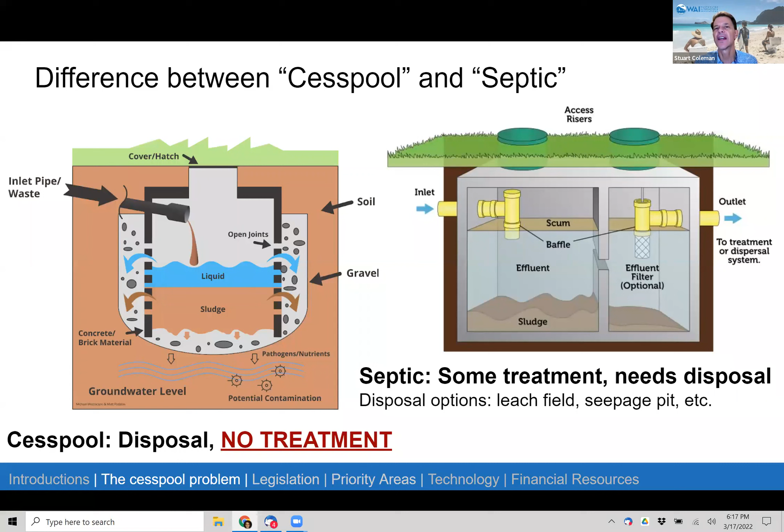A septic tank, on the other hand, is an enclosed tank. All the wastewater comes into the tank, and the solids settle to the bottom. Then the liquids are filtered out and go into a drain field or leach field. Believe it or not, that's where most of the treatment happens—the microbes in the soil, if it's designed correctly, eat up all the waste and take care of a lot of the pathogens. Unfortunately, what it doesn't do is take care of the nutrients. So that's a distinguishing factor between those two.

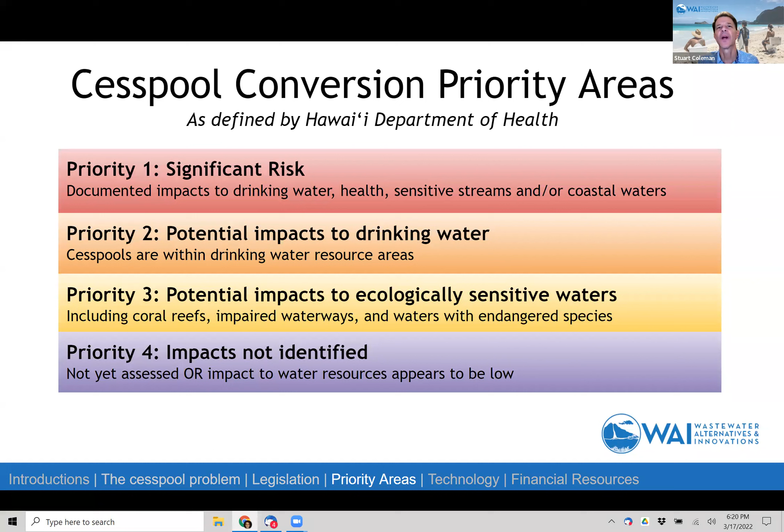Priority two is potential impacts to drinking water in certain areas, such as wells, and we'll share a disturbing statistic from the Big Island about that. Priority three is potential impacts to ecologically sensitive waters and coastal areas, including coral reefs and areas with endangered species and reduced fish populations.

In total, we have 88,000 cesspools across the state, and 49,000 of them are on the Big Island. This is why we're glad you joined us tonight, because it's a serious issue. The Big Island has by far the most, discharging 27 million gallons per day of untreated wastewater. On the Big Island, there are four priority areas. Kea'au has potential impacts to drinking water, which is really serious and what we want to talk about. The other areas have potential impacts that could be upgraded to priority one or two when we finish this reporting.

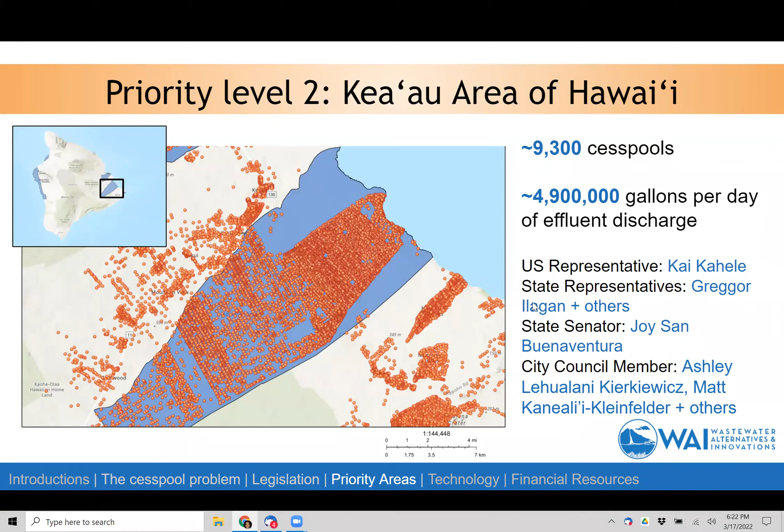Next, I'm going to talk a little about the health and environmental risks of cesspools. There are different types of environmental and health risks. Cesspools can affect drinking water and coastal waters. On the public health side, drinking water pollution can come in the form of different pollutants and pathogens that get into drinking water sources, like your wells. Nitrate is a pollutant from wastewater that can get into drinking water, and nitrate can be connected to increased cancer risk.

You can also encounter pathogens in the environment, such as in the coastal ocean where you go swimming. If you swim in polluted water, you can get sick to your stomach, or get infections on your skin, ear, or eyes, from encountering wastewater-polluted water.

On the environmental side, nutrients that get into our reef environment can lead to invasive algae overgrowth, meaning invasive algae overtakes native limu and corals, degrading the Hawaii coral reef ecosystem. There's also evidence that sewage pollution can lead to increased rates of coral disease and reduced coral cover overall, as well as changes in fish behavior and other harmful effects on the ecosystem.

Finally, there are contaminants of emerging concern. These are chemicals found in plastics and in pharmaceutical products that are getting into the environment and can affect both humans and the ecosystem in ways we're still learning about.

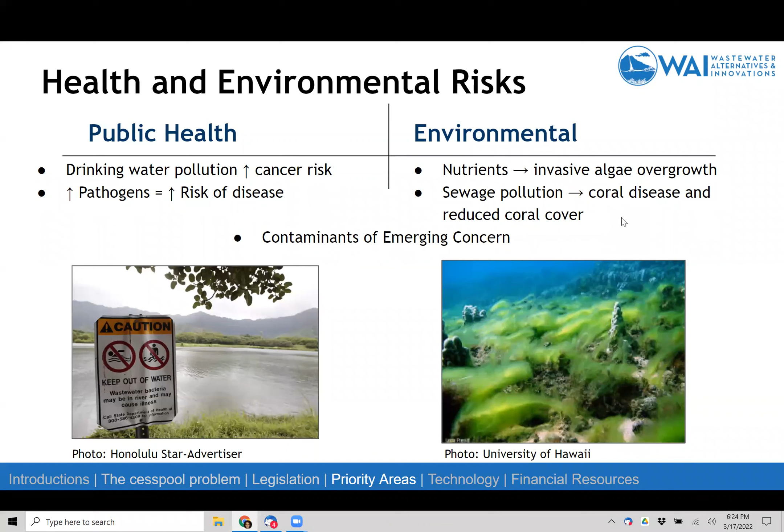So I will talk a little bit now more specifically about water quality in the Kea'au region. As I mentioned before, this region has a risk for drinking water, especially for folks that are on private wells. The way we can track whether there's contamination in your water source is using fecal indicator bacteria, or that's one of the ways. There are several, but this is the way that has been used in this region.

Fecal indicator bacteria aren't typically the bacteria responsible for diseases, but they are found in sewage and they're easy to detect. They're what the US EPA uses. It basically tells you that if there's fecal indicator bacteria in the water, other pathogens are likely present and it's possible you could get sick.

So the bacteria that we use is called Enterococcus, and this is something that's in the intestines of mammals. And since humans are mammals, it's a good tracer of when there's wastewater in the system.

So in Kea'au, there's a very fast infiltration time from the cesspool to the groundwater. This means there's not a lot of time for the waste to get treated, and it goes right into the groundwater. A Department of Health study found that 25% of the wells they sampled were positive for Enterococcus fecal indicator bacteria. So you really don't want to be drinking water that's polluted with bacteria, of course. That's kind of a scary statistic.

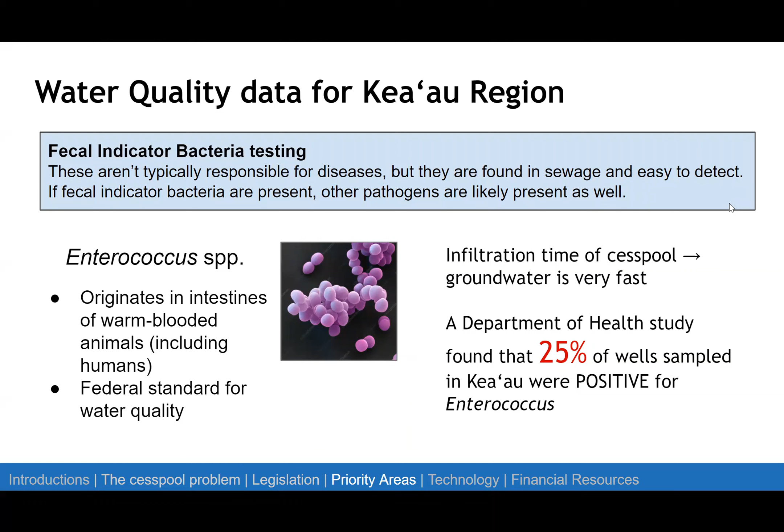On this next slide, you can see a map of where those wells were sampled. These are sampled closer to the coast, and there were 32 wells sampled total. Actually, 50% of the wells were positive for total coliform, which is another type of fecal indicator bacteria, and 25% of the wells were positive for Enterococcus. So this is a pretty worrisome situation where there's definitely a risk of disease transmission in the drinking water wells.

Because of the hydrology of the area, during rain, the time from when waste is in your cesspool to it reaching the groundwater can be as little as 8 to 11 hours. That's a really, really short time. There's basically no time for microbes and things to break down nutrient pollution and pathogen pollution.

There's also evidence that cesspools are increasing groundwater nitrate, but luckily not to the extent that it would be dangerous in terms of elevating cancer risk, but it is something to keep an eye on. I also want to credit Bob Whittier and the Department of Health for this study and for sharing this map with us.

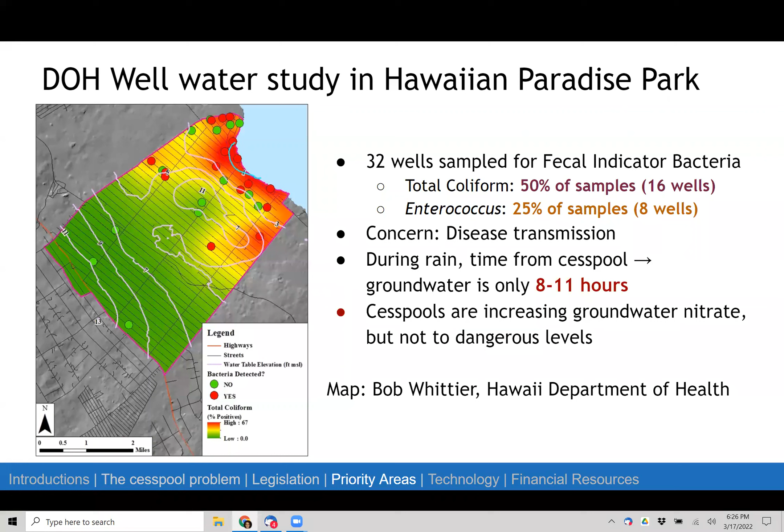So we also are concerned about what happens once that sewage waste goes from the groundwater into the nearshore ocean. We're partnering with the Department of Land and Natural Resources Division of Aquatic Resources, or DAR, who are working on a 30 by 30 Holomua initiative, which is basically a goal to manage and protect 30% of Hawaii's coastlines by 2030.

They're in the process of coming up with how to do this. It includes place-based planning, pono practices, protection and restoration and monitoring. WAI is partnering with DAR to inform and advise on how wastewater pollution and other types of land-based pollution affect the reefs. There's some information there on how you can learn more about that initiative. Just keep in mind that this is both a drinking water and coastal problem.

All right. Thanks, Christina. That was great.

So going to technologies and thinking about what could be potential alternatives to these cesspools. Let's go through them together. The first one that people commonly think of is county sewer, municipal sewer that is centralized, and all the waste goes through pipes from each house to a centralized treatment plant.

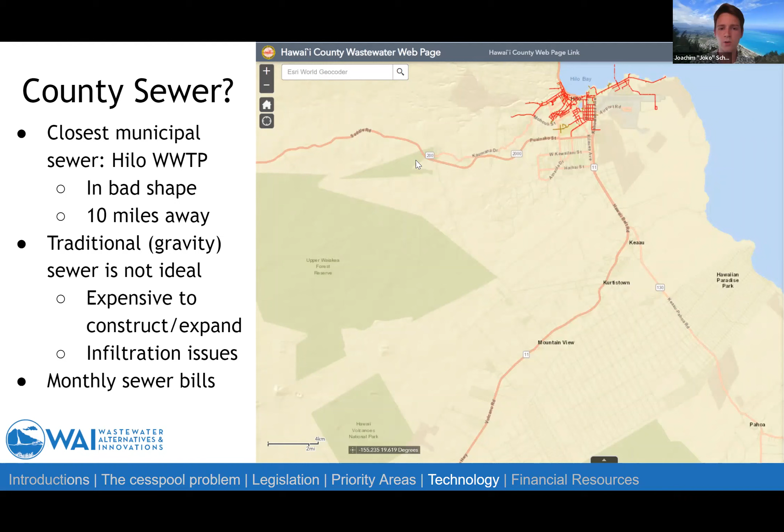Groundwater or stormwater can enter the pipes and lessen their capacity, so sewer isn't the silver bullet some people think it is. It also comes with monthly sewer bills in perpetuity. But where sewer is available and the treatment plant is doing well, it's obviously a great solution, especially in urbanized areas. So sewer isn't always bad, but it shouldn't be the first solution in this case.

So questions may come up, such as: what else should I convert my cesspool to? What about septic, or what about composting toilets? Let's talk about septic first.

Stuart had earlier mentioned the shortcomings septic might have, which is that it requires lots of space for the leach field, and nutrients such as nitrogen and phosphorus still escape the system because it doesn't provide room for the bacteria that remove those to exist. So those nitrogen and phosphorus still pollute the water resources, meaning traditional conventional septic isn't quite enough.

And what about composting toilets? We like to say composting toilets work really well for a small number of people, but they require a lot of maintenance and know-how. Even if you're perfect at maintaining one, you're still handling raw human waste, so it's not without hazards. The Department of Health in Hawaii, whom we work closely with, doesn't recommend them for the general public especially, and the composted waste can't quite be used in agriculture here anyway. So we don't like to promote them here.

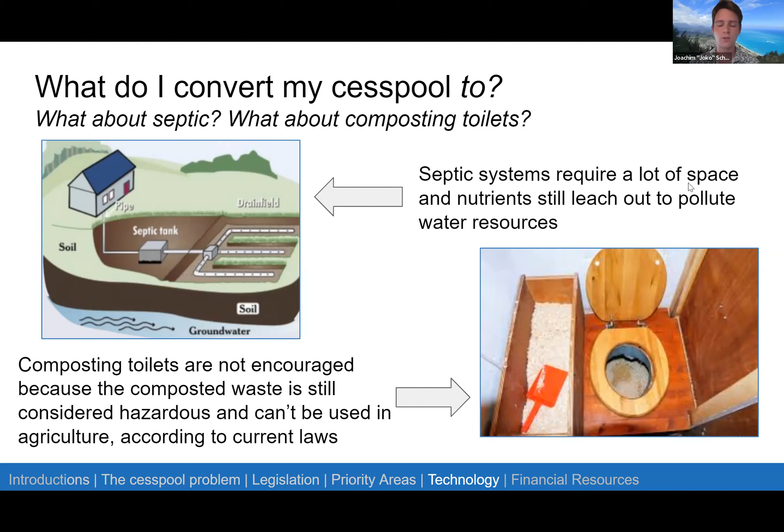We think we have better alternatives. Going from the toilet scale up, we partner at WAI with a company called Cinderella from Norway, who produce an incineration toilet — a waterless toilet with no hookup to sewer or water. It incinerates the waste right in the toilet into a pathogen-free, odorless ash, powered either by propane or electricity.

These are great to replace porta potties, or if you want to add a bathroom somewhere or an outhouse, or for remote areas — these have come in really handy. We've installed over 30 of those across the islands, and people are generally very happy with them. Of course this comes with a small behavior change, but toilets haven't been revolutionized in over 100 years, so maybe now is the time.

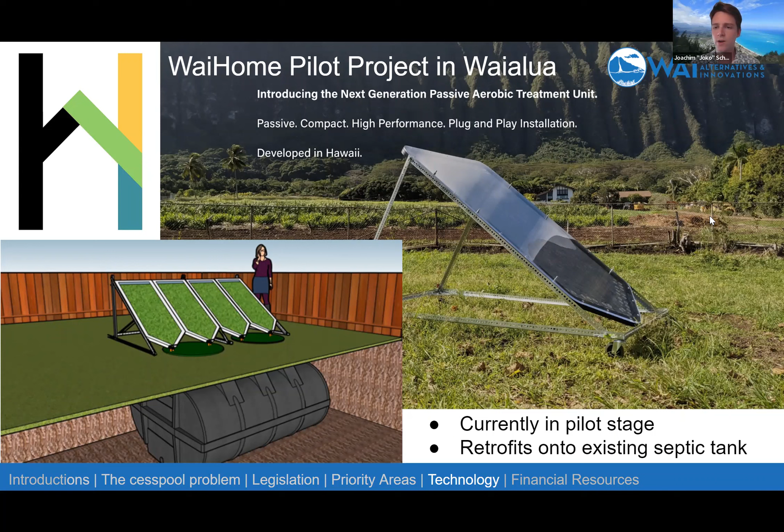Going through more of the technologies we partner with — companies we're excited to bring to Hawaii — this one is called WaiHome, founded by a local young engineer who wanted to invent something that could be retrofitted onto existing septic tanks to improve their treatment. It's a passive algae-based treatment system we're currently helping him pilot in Waialua on the North Shore of Oahu. It's in the pilot stage, but we're very hopeful about it, and we'll keep you in the loop on how the testing goes.

Then there are more established systems we call enhanced septic systems, because they adopt similar techniques with treatment first and then a disposal field, but the treatment is a notch better because it removes nitrogen that is otherwise very harmful for the environment. Going left to right, we have a biofilter — we partner with a company called Eljen on that one. They use a conventional septic tank, but the leach field has a layer of wood chips beneath it, which allows certain bacteria that remove nitrogen to survive.

Then we partner with a company called Ridge-to-Reefs, a nonprofit that's going to tell you a lot more about this in a minute — it's a constructed wetland they call a bioreactor garden, using plants and bacteria to treat wastewater before it enters the leach field. Lastly, the aerobic treatment unit, which we partner with a company called FujiClean — this uses electricity to create small air bubbles where bacteria can thrive before it enters the leach field. There's no one-size-fits-all solution, but one of these is likely to fit in many places.

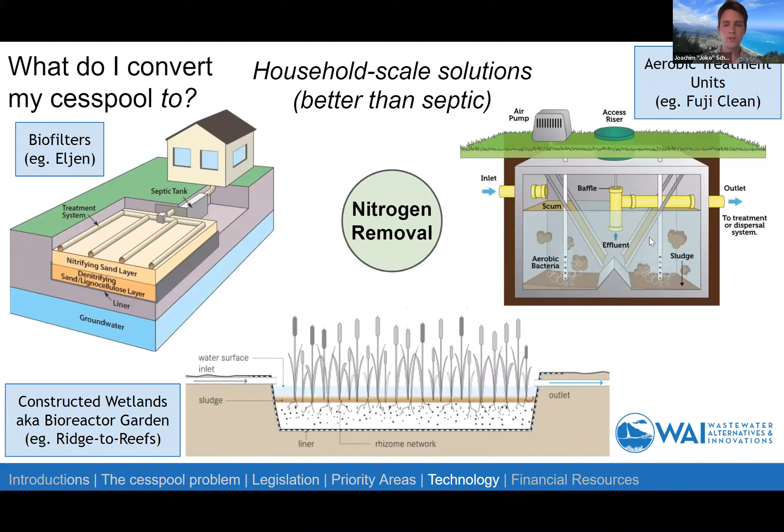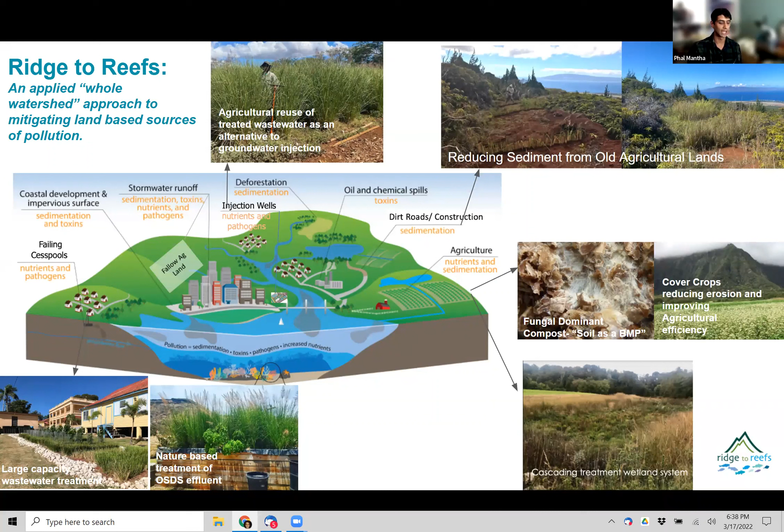Below that image is an example of a cascading treatment wetland system, used to mitigate pollution from agriculture. The two images on the bottom left - one is a system we built to treat effluent from a 27-room hotel in Puerto Rico, and the other we'll discuss more in a moment.

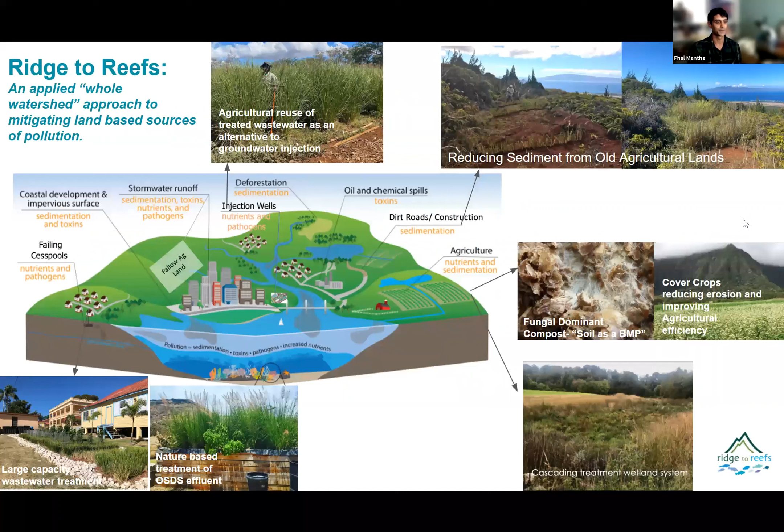That is the Ridge-to-Reefs bioreactor garden, more geared towards on-site OSDS effluent. Thank you, Joko, for moving to the next slide.

For the USDA Rural Development Technical Assistance and Training Program, funded through the Water and Environmental Programs Department, we're focusing on 5 high priority cesspool areas across the state. We're providing information to interested parties, particularly with considerations for upgrading cesspools, either at the individual or community level, which is part of this meeting today. We're also providing technical information and training to practitioners, NGOs, and stakeholders.

That event is coming up May 27th, in Hilo at the ARC from 11:30 a.m. to 4 p.m. We hope to see you all there.

We will be providing a technical memo, created with input from stakeholders, on issues and challenges, as well as potential solutions and funding opportunities as they pertain to cesspool upgrades and nature-based solutions. Where there's interest, we will assist communities with applying for funding opportunities as well.

Next slide, please. This is an image to highlight something we all know already: one of the real challenges in Kea'au, as well as Puna as a whole, is the volcanic geology. Being so close to the surface can lead to high excavation costs and a variety of other issues we have to be aware of when addressing this. We'll get into this further as we talk about our specific system, the bioreactor garden.

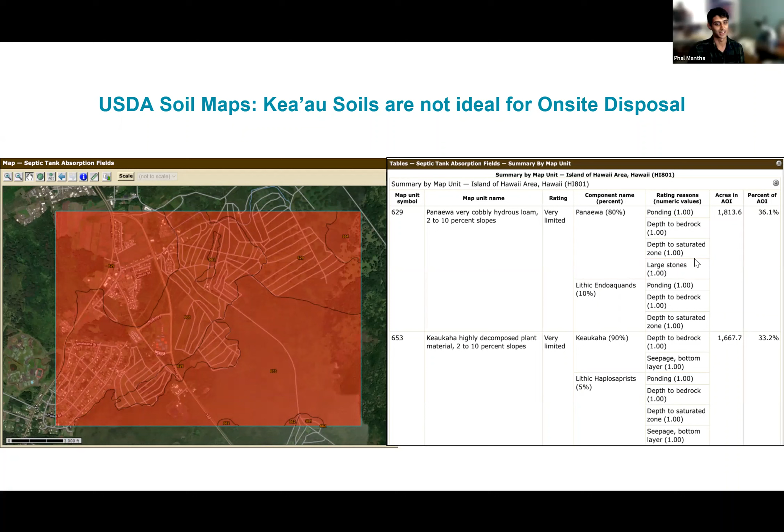The variety of vetiver we use is the sunshine cultivar. It is triploid and sterile, so it's not really a concern in terms of invasiveness. This system was tested by University of Hawai'i, and we designed it for 600 gallons a day, or 3 bedrooms.

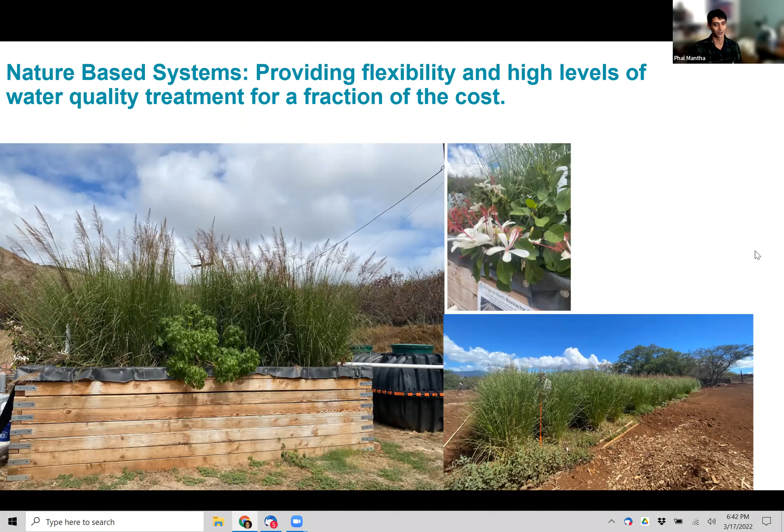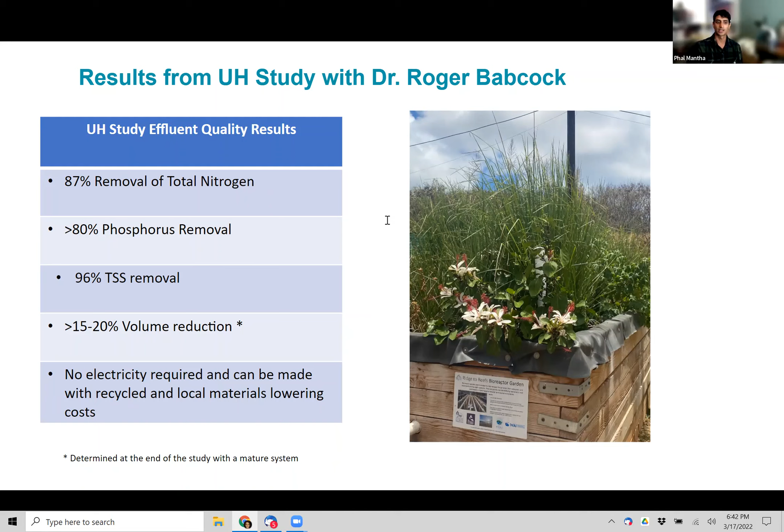Thank you all. Thank you so much, Phal.

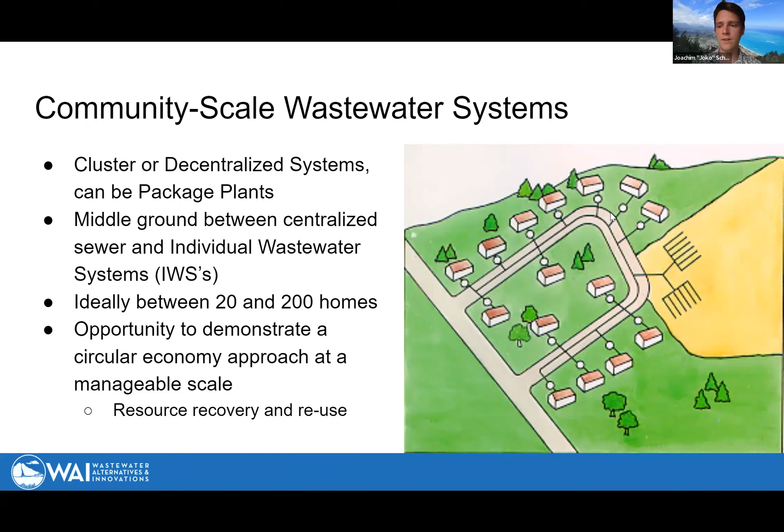The great thing about this scale is that there's an opportunity to reuse liquids and solids beneficially when they're well treated, rather than just wasting them by sending them out to sea or putting them in a landfill. A way to get to a community-scale system like this: there are two mechanisms available in Hawaii, called Sewer Improvement District, or Sewer ID, and Community Facilities District, or CFD.

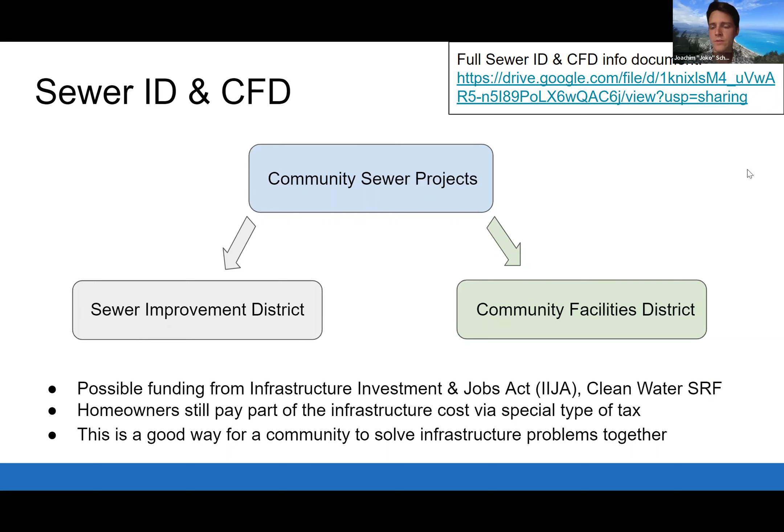When the PDF of these slides is sent out to you all, you can click the link in the top right, which will send you to a document explaining the legal background of these mechanisms and how they're created. But what I'll say now is these make it possible for funding from the federal level to come down through the county to individual households, helping everybody pay as a community with fair shares and a special type of tax assessed for this, while also bringing in external funding to make a community system possible. This is a good way for a whole neighborhood to solve this problem together, rather than everyone converting individually and missing out on the benefits of economies of scale.

And economies of scale is a great keyword. I'll kick it back over to Stuart.

Yes, thank you. And since we have two council members on there, if you're interested in doing that, you can either create a sewer improvement district by getting almost 50% of the community to agree to sign up and do it, or the county council members can vote for an area to create a sewer improvement district. So just want to set that background.

So we're working with a number of groups that we're just trying to introduce new, more efficient and affordable technology to Hawaii. And one of those is Cambrian. They have a community scale wastewater treatment that's containerized, so they can ship it ready to go to Hawaii, and it's ready to hook up into any neighborhood, and it's scalable. They can increase the size of it or move it around, so it's not permanent, which is also a good thing. And it can produce water that is suitable for recycling goals and irrigation, which increasingly the EPA is kind of adamant that we do, because our water supplies, especially in the face of climate change, are dwindling.

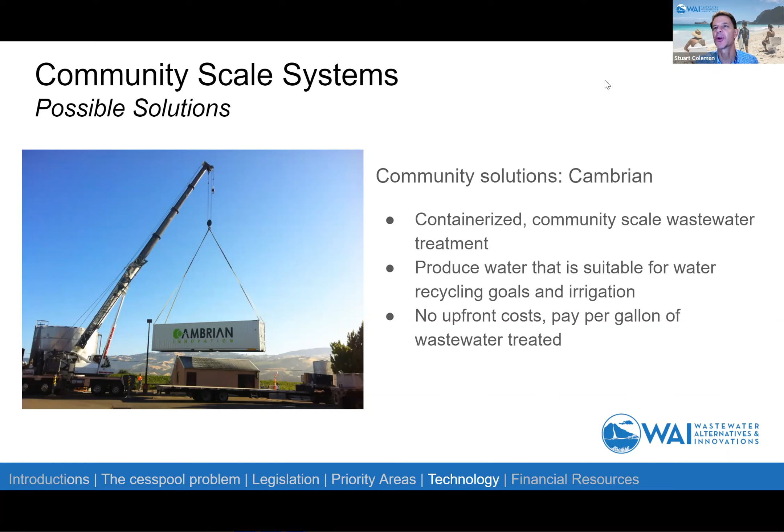And there are no upfront costs. They do what's called sanitation as a service, whereas instead of having to spend millions and millions of dollars setting up a plant, they can set it up so it's financed and people can just pay per the gallon. So pennies on a gallon in monthly fees. This is a really good company that basically takes the wastewater from a community and charges each homeowner a monthly fee. So instead of paying anywhere from $20,000 to $40,000 for a conversion of your cesspool, you could just come in and start paying fees.

Cambrian can take that wastewater, turn it into reused water for irrigation, working with landowners, if we have landowners that are in need. And in certain parts of the Big Island, we know that that's definitely the case.

Another partner that we worked with is one that I met through the Bill and Melinda Gates Foundation. This is Biomass Controls. Whereas Cambrian can recycle the liquids in this waste stream, Biomass can turn the solids into biochar. Using this equipment that they have, through high heat, low oxygen over time, they can turn this into 100% pathogen-free biochar. And it's a great way to take something that's normally just wasted and trucked to landfills at a very high cost and use it for other uses.

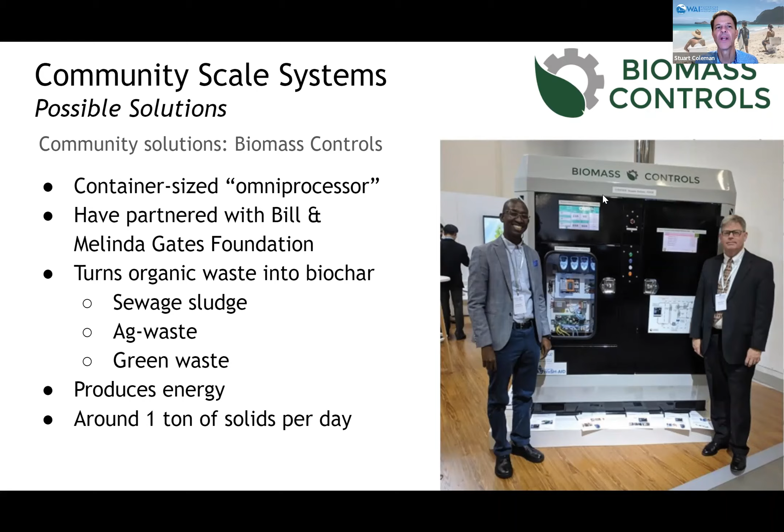It can produce energy and it can process up to about 1 ton of solids per day. So this shows you, like, the dried sludge can be transformed into biochar, which is a miraculous thing. On the right, it's odorless, pathogen-free, and this is something that can be used as a soil amendment, and it's also a carbon sink. The state has certain obligations that we have to be 100% carbon neutral by 2045, and this will help us get to that point.

It's much cleaner, much more efficient, saves energy, and the great thing is biochar, which they used a little bit of in the bioreactor gardens, is also, besides being a soil amendment, it helps prevent erosion. In places where we need soil desperately and more sources of nitrogen and phosphorus, we need it on the land, not in the water going out into the ocean. So it's a great substitute.

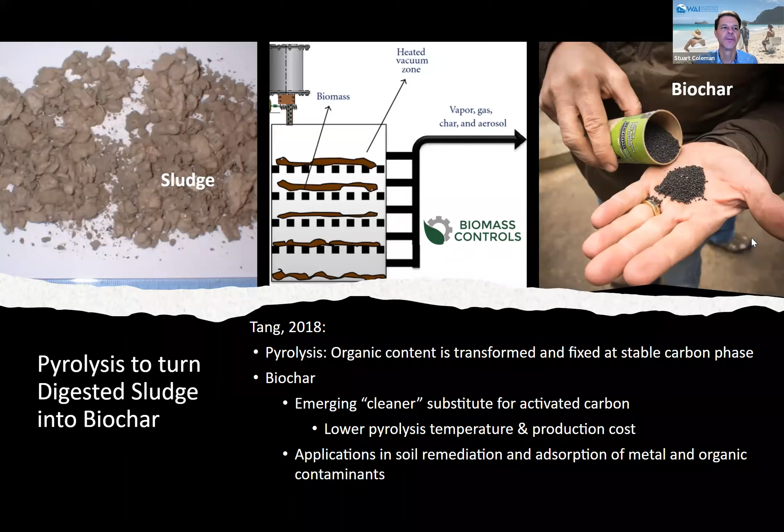And then we have also started working with one of the larger wastewater systems in the country called Orenco. This is, they have what's called a PreLOS model, which is a pressurized liquid-only sewer. So what this allows is they have a tank that can be installed in the yard that collects all the solids, but it has a pump, and so it pumps all the liquids, which is the vast majority of the volume of wastewater.

And so it can pump the liquids through very small diameter pipes, not far underground, and then connect to pipes throughout the community. So you don't need manholes, you don't need super expensive and disruptive sewer construction, which will disrupt roadways throughout Hawaii. So it's much easier, much more energy efficient to pump. They also have a program where it can be like sanitation as a service, so you don't pay for all the expensive stuff up front. There's a lot less clogging and operation and maintenance costs, and it can fit in any topography.

And the great thing is that in areas that are close to the shoreline, sewer systems are always going to get infiltration and inflow.

You can't help it, so in areas that experience flooding, inundation, or high rains, there's always going to be infiltration into those things. These do not have any infiltration issues, and so you can put them right next to the coast. So that's very valuable.

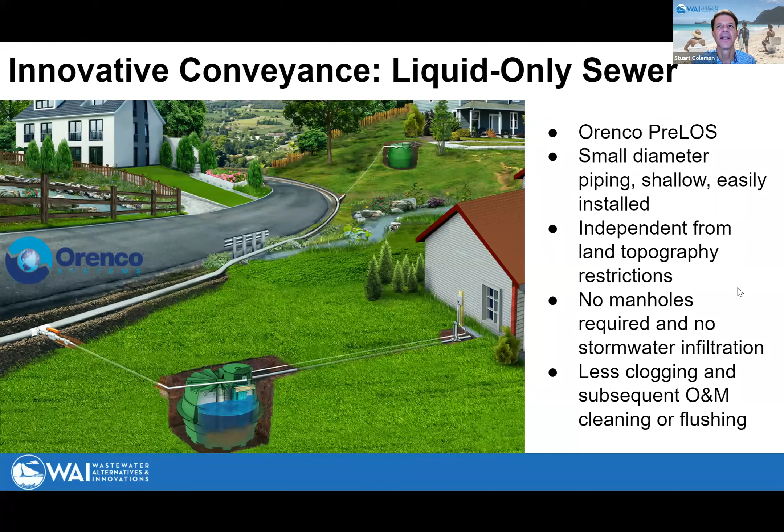So if we look at combining all these systems, what we're looking at is a circular economy approach. Right now we have a sewer system and these huge plants that we spend hundreds of millions of dollars building, transporting this waste just to treat it, and then pump the liquids out to sea that still have a lot of nutrients in them that are not good for the ocean.

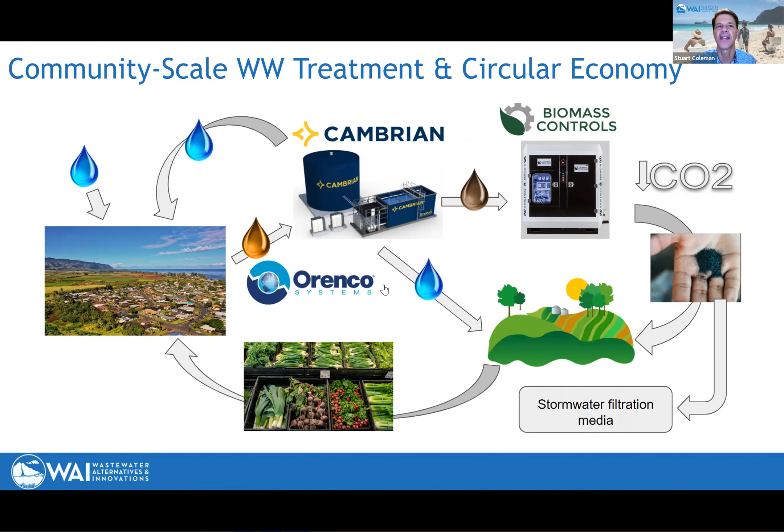On the financial end, we are working with the USDA and their Rural Development Office on grants and loans. They have 502 loans for those that qualify, and then 504 loans and grants for those that are 62 years or older and qualify with their income.

I'm going to be very honest with you, we haven't found a lot of partakers of this. It's a complicated process, and so we really need to work with the USDA and really get them to make the process a little bit easier. Sometimes the value of properties in Hawaii disqualify people, or the incomes, but they don't realize out here that we have such a high cost of living. So we're working on that, but it's still something for older and lower income folks to take advantage of.

The silver lining in all of this, folks - we really appreciate this is a lot of information you're taking in - is that the bipartisan infrastructure law that just passed is the largest infrastructure bill of its kind in the last century, since FDR and the Great Depression, when we had the works progress programs. So there's a lot of money coming, and we just have to make sure that Hawaii is prepared to access that funding.